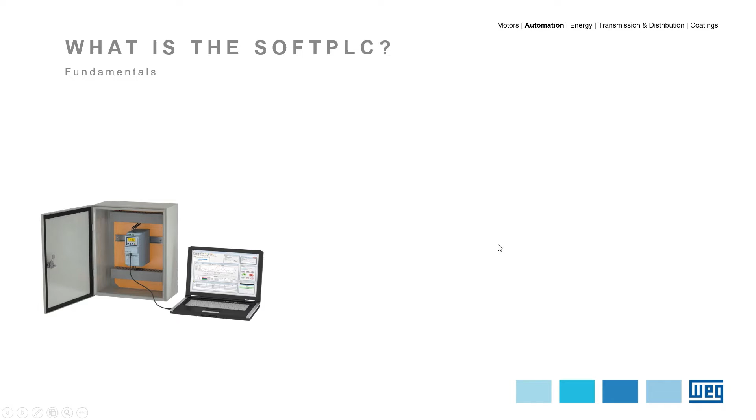So what is the soft PLC? The soft PLC is a feature, or let's say a tool, that brings PLC functionalities to a given equipment. In our case, it can be an inverter, a soft starter, or any equipment from WEG that carries the soft PLC function. And that eliminates the need for an external PLC when used for simple applications.

Basically, it's a tool where you can get your PLC code onto it—you get your PLC code on the drive itself. And with that, you don't need an external PLC attached to the drive.

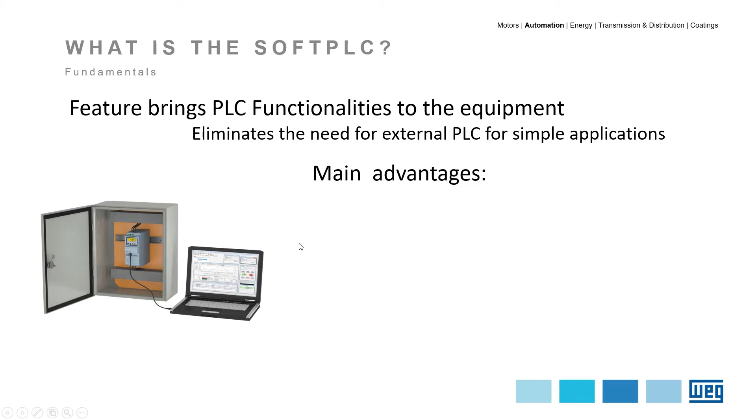Now that we know what it is, you must be thinking, why do I need this? In other words, what is the advantage of that? So I put down the main advantages just to show you guys as well. Number one is that you reduce your hardware cost with an external PLC.

So if it does eliminate the need for an external PLC, you don't have to pay the cost for that external PLC as well, right?

Number two, it reduces the required spaces on cabinets. So in this example here, you have the cabinet with one drive on it. If you need another external PLC, you will need to fit this external PLC to the cabinet itself, which in general means larger cabinets, right?

And if you think about ventilation as well, it means you need more ventilation to those cabinets when you have an external PLC, simply because the PLC will generate a little bit of heat, and you have to dissipate that heat as well. So in the world we are today, where efficiency is an important point, that means more efficient cabinets as well.

Okay, and this also eliminates the cabling between the PLC and drive. So if you have an external PLC, you need to wire that external PLC to the drive itself. You don't need that when you can integrate all the functions in only one unit, right?

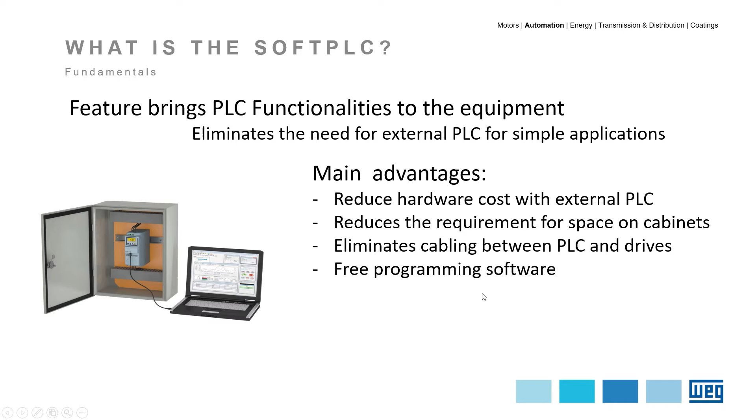Okay, so now we know what a soft PLC is. We know also the main advantages. So let's get to the basic operation. How does the soft PLC work?

So in very simple words, you're programming, or you can program your code onto this soft PLC function, and this code will be in ladder. For the ones that are programmers, ladder is a very known language in the market, and that's how you can code your codes onto the soft PLC, right?

So what you do, you will record this code internally to the product. That could be a VSD or a soft starter, and then you will also emulate this code via the product. So when you code it, you have to give it a go to start, and then the inverter or the product itself will run that software or that code that you built.

And then internally to the drives, we have a few variables which can be used in this code. And you can also use all the IOs, which is short for inputs and outputs, to do your code. So you can use that onto your program. And also you can read and write some of the things from your network and use that as well onto the code. So it's a very complex tool. You have multiple options to use it and to code it, and you can use it as per your convenience.

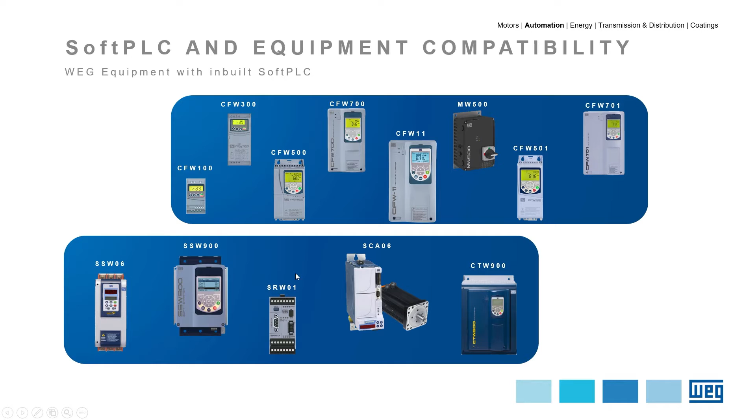All right, so moving on, guys, let's get to the interface now.

Okay, now let's talk about the software interface. We have basically two different softwares to do the interface between your computer and the product itself, which you're gonna get your code onto. The first one is called WLP, short for WEG Ladder Programmer. And we have another one as well, called WPS, which is WEG Programming Suite.

Today I will focus a little bit more on WPS, which is the latest software, if I put it that way. But I will touch base quickly on the WLP as well, so you guys get a taste on how it is, right?

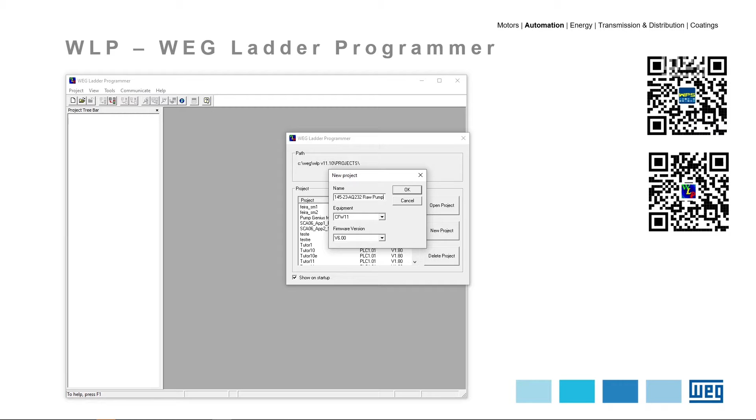I'm gonna create one, give it a name. You can give the name of your drive tag number or something like that. Let's pretend this is a tag number, so G23 switch room and the equipment AQ232. I prefer in capital. And then I'll get raw pump. Cool. And let's say this is the CFW11 and the version itself. Okay, so this is how it looks like.

I'm gonna put it in full screen just so you get a better view of the software itself, right? So this is how it looks like. You will have a blank page where you can create your code, and then you can start creating your code with the functions you have available in here.

So what I can do is something like that just to get a little bit better organized. I like to organize stuff this way, but anyway, on the top here you have a few menus as well where you can save backups to be used in the future. Guys, I'm going really quick on this one just because the focus today is on the WPS, but I guess it's quite intuitive as well. I would encourage you guys to give it a go and try using that, right?

So to create, you can just get this one here, for example, normally open contact, and I'm gonna get a coil in there. I'm gonna get a normally closed as well, just in case. And for example, I can connect the dots using this, right? And then if I double click on the normally open or any block, it will give you the properties of that given block, and then you can choose what you want.

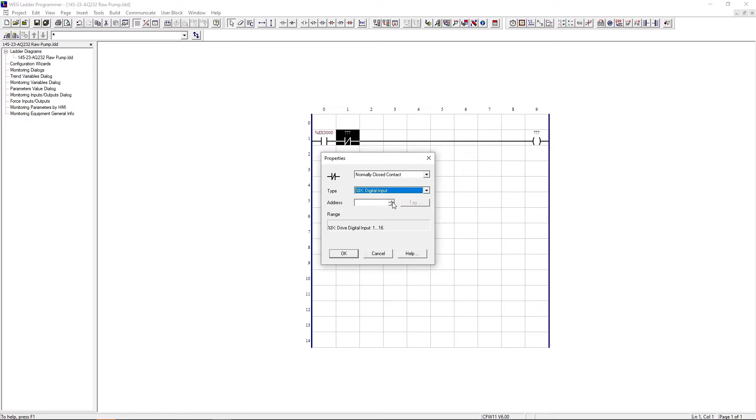Okay, I'm gonna leave it as normally open, and I will use this normally open as a system marker as a general enable. And then I use this one as normally closed, and I address that to a digital input number 2, for example. And the coil I can address to markers, or I can address as well to system markers or user parameters and stuff like that. And I'm gonna say, well, for this one, it's a run stop command.

So in short, what this line is saying is that when you have a general enable enabled, so this will be closed, and you have the digital input off, right? So when it's off, this will be closed as well, you give it a run command to the drive. If the digital input is on, this will be opened, so you don't have then the run command. Either way, if your general enable is off, this will be off as well. So guys, this is in short how it works.

I don't wanna go too deep on the WLP, it's quite intuitive. I think it's time now to close this one. Do you wanna save? No. And let's get to the WPS now.

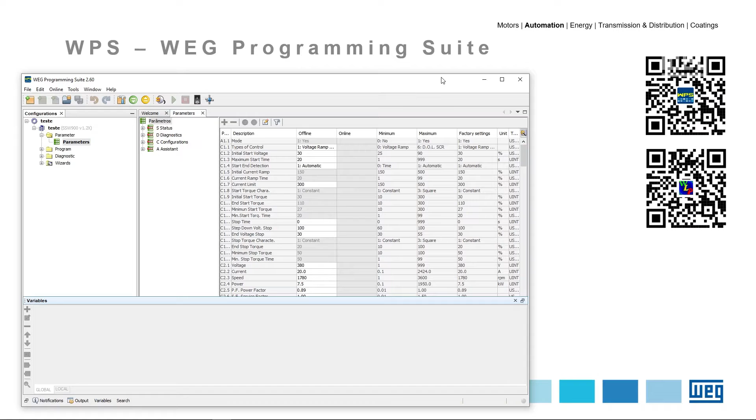Okay, similar to the WLP, I'm going to open the WPS software as well, so let's give it a go. We're using version 2.6, and it's opening now. It does take a while to load a few of the modules. Since I was using it before, it opened in a different way, so I'm going to close this one and take this test off. Let me delete that to start from scratch.

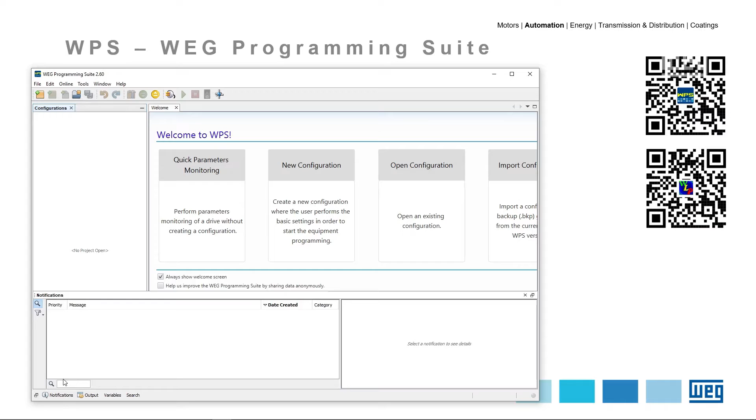All right, so this is from scratch. When you open the software, it will open this way. Eventually you might have notifications to get your system upgraded. When we have news or new modules, and you're connected to the web, the WPS will communicate and tell you that you need to do upgrades. In this case, I don't have any.

So what I'll do is shut this off and start a configuration file. Guys, I have in my computer an SSW900, which is a soft starter connected to my computer, so I'm going to use that. When you create this configuration file, which is basically a folder, you'll see when you open it, it gives you a few options.

So again, I'm going to set the configuration name. I like to put tags on it: 1-2-3-4 dash switch room 56 dash 78A, which in this case will be a compressor - compressor 1. And I'll use the resource name as SSW900. Let's give it a go, hit next.

So I know what the device is, so I'm going to select the SSW900 here. I like to test it before, and it's saying the device is online, so good to go. I'll hit next. Now the system is creating all those folders - it can take a while.

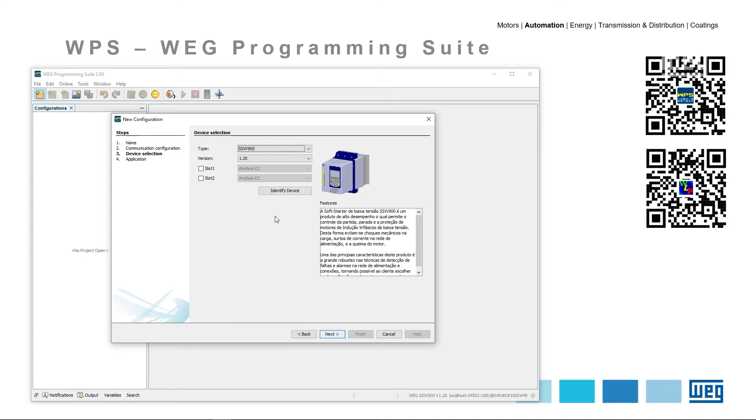And here we go, we have the SSW900 connected. It's giving me the version of the software - the one I have is fairly old, so it's 1.2. I'm going to hit next.

So when you hit next, you get to this page where you can actually import a WLP backup, which remember is the software we were talking about before. If you have a backup from WLP, this is the time where you can load that file into this configuration file. I don't have any, so I'll leave it blank and hit finish.

Okay, so you can see now we have compressor one in here - it's a folder. So we can see it better, I'm going to make it full screen as well, and I'm going to open this one. So that's equipment WEG, and then I have different folders in it.

This is very interesting - I can open, for example, the parameters folder, and if I double click on parameters, it will open all the parameter files in there. I have an icon to connect to the device, so I can use a shortcut, which is F9, and I'm going to connect to the device.

So what I have here is your online data. If I change it to 240, for example, it will change up there. So if I change the current to 5 amps, for example, this is changing online, this information onto the soft starter. So instead of using your HMI, this is another option to get the parameters configured onto the device itself.

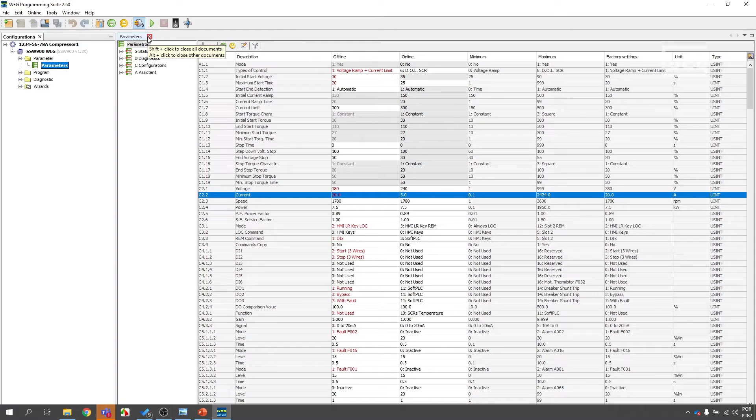Okay guys, now that we've finished with the parameters, let's move on and I'll show you the wizards - I think it's a very interesting tool as well. Let me open this up so you can get a little feeling on how it works. So this is how the wizard looks like - you can actually see the graphs and how to get your parameter settings onto this data.

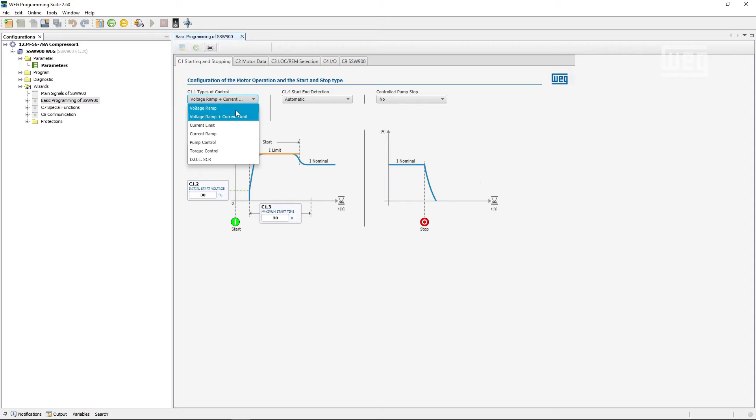So because we are talking about soft starters, this will bring the information for soft starters. But if you have an inverter, for example, then you'll have different options in there to reflect the inverter operation. So in this case, I can change it for a voltage ramp, for example.

Here I can change the initial start voltage level from 30 to 40, for example. I can also set up the starting time, it was 20 seconds, I can get 50 seconds, for example. Then I can check and change a few of these options on starting and stopping.

If I move to the motor data tab, that brings up a visual picture of the motor nameplate. In this case, we have a W22 example, and you can gather information for each of these fields. So it's very intuitive and easy to find.

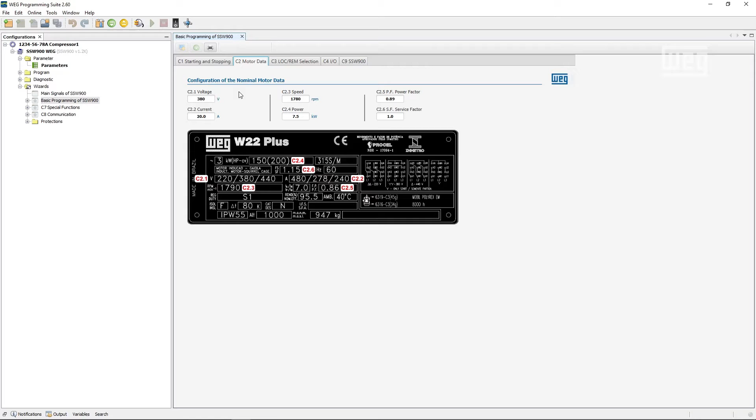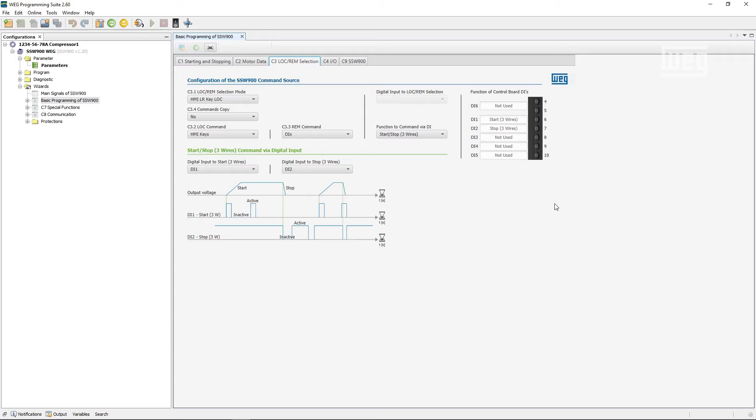Then we get to another tab, the local remote selection. This is basically how you set up your starter automation, let's say when it's in local, what you will do, how you're going to give the commands to start and stop. This is done via this tab.

You can also set up your IOs here. There's a graphic that, for me, is very intuitive as well, because you can see exactly how to connect your IOs, and you can give the functions of those IOs through here too.

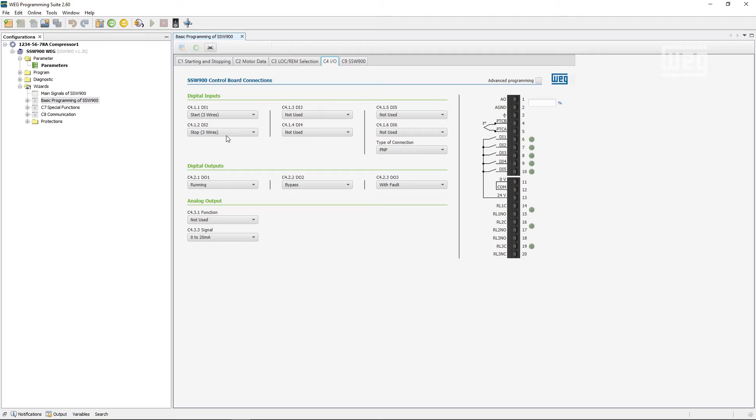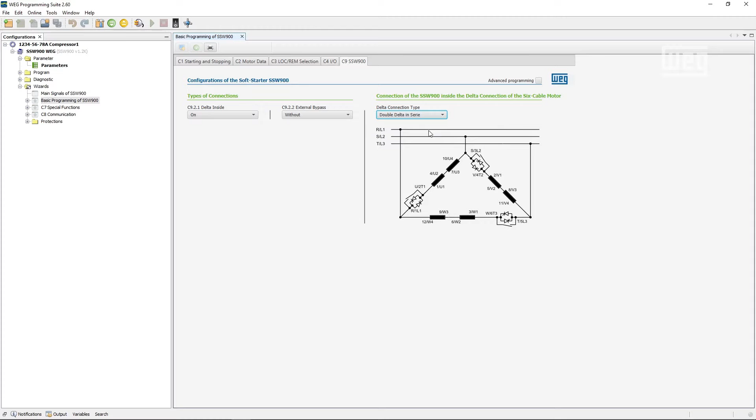Then the last one is basically whether your connection is inside Delta or not. If it's inside Delta, it will change the graph, so you basically know how the terminals should be connected with the motor. And if you have different types of motor, it will also give you this graphic representation of your connection points.

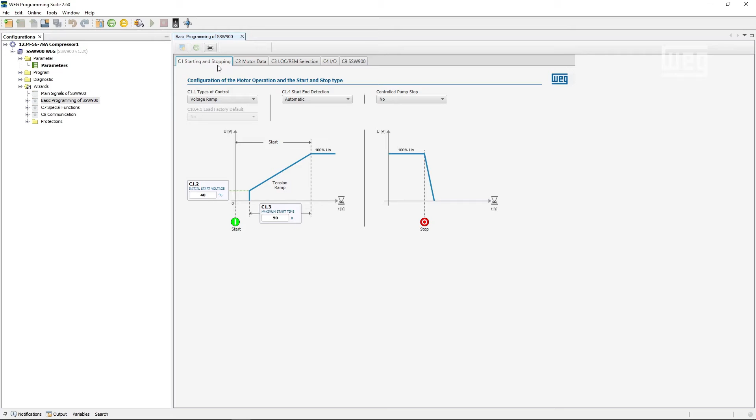So for me, this is a very intuitive tool. It's bulletproof, so it's good to set up through that as well, just in case you're having difficulties visualizing how to set up via the HMI. A good tool on the WPS.

I won't save it because we're not actually doing that. There's another diagnostic folder where you can actually create trends. You can give it a new file, say this is trend number 1, finish. Then when you open this trend, you can add channels to it, and those channels can be different things.

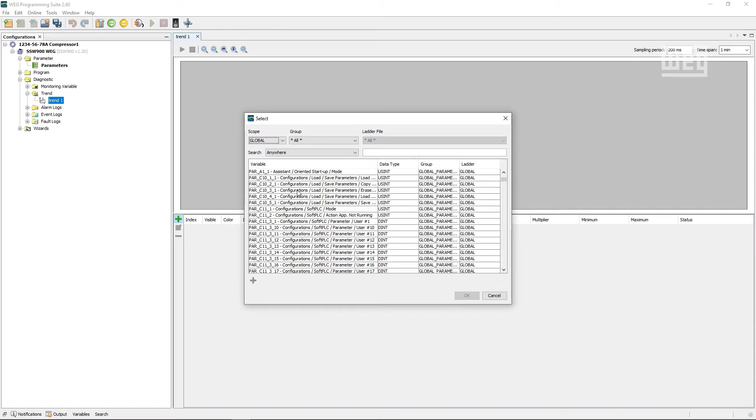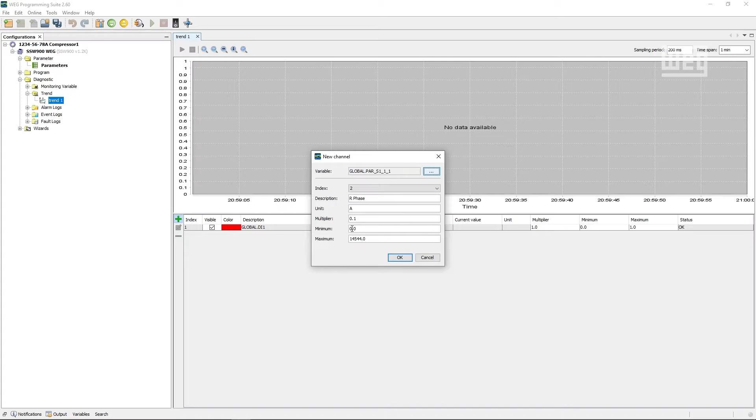And then if I am connected, yes, monitor straight away, I can trend that. Because my soft start is not running at the moment, it's all at 0. But if I change the status, then you will have the information in there.

You can change the sampling time over the top, or the time span as well, instead of 1 minute you can get like 15 minutes. Then you can stop and close if you want, and it will ask if you want to save. Yes, okay, that's saved. And if I open again, you get the saved trend onto your file as well, in this big folder with information from the soft start.

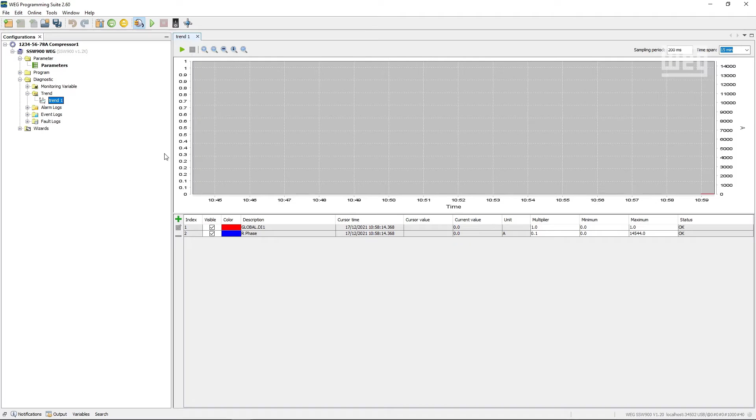Again, this is a very good tool when you're commissioning your soft starter or equipment, because you can save the trends. For example, you can rename this, like this is the 1, or you can put 01 first start, for example, and then you have that information on how the first start was. You can rename it, and that's a few of the tricks I've learned along the way.

So you can put 01 and you can put a year or a date, so you can say this was on December 21, for example, first start. Then along the lifespan of this product, if you connect again in the future, you can save another trend and compare how it is doing. So it's a very good tool to use.

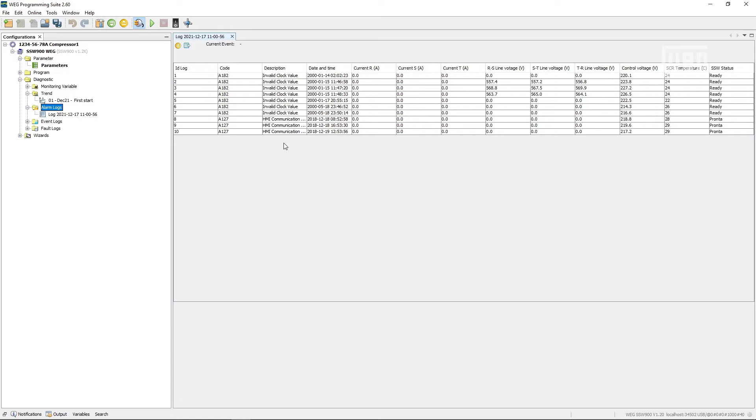Then there are a few other things, the logs. It's pretty intuitive as well. You can load these alarm logs from the product, then rename it. It will bring some information in there, but you can also rename it and delete it if needed, say if it's too much information. The same works with faults and the event logs as well.

So diagnostics is a good folder to keep track of how the equipment is doing, and it's very good as well for commissioning, when you can trend the data and get the best setup possible for your application.

Now let's move on to the intent of this presentation, which is the ladder. I'm going to open the main ladder screen. I'm not going to connect it, because when it's connected I can't actually make any changes, so I'll disconnect it and have the space to do my code.

So this is how it looks like. When you first open it, you have only a single line. Important point: when you need to add lines, you keep adding lines like this, and you can also delete lines. So I'm going to add this line.

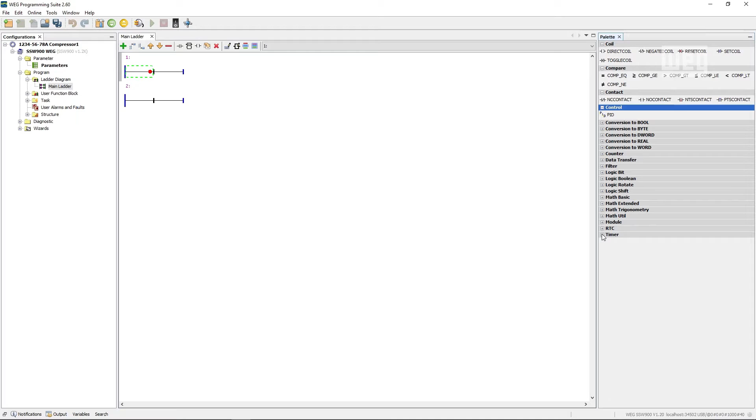So those are the options you have to code or use in your code. You have coils, comparison blocks, contacts, controls, PID controls, data transfer, mathematic functions, timers, and RTC modules. So there are a few options in there.

The way it works, we just get one. I like to get contacts because we use them fairly a lot, and you can just leave it there. And I can use another one, leave it there. And then I can finish it up with a coil, for example.

So this one didn't go, I'm going to place it in there. You can see the red dot, which is the end of the line, and then you just need the coil after that. So we have all the blocks and the coil itself.

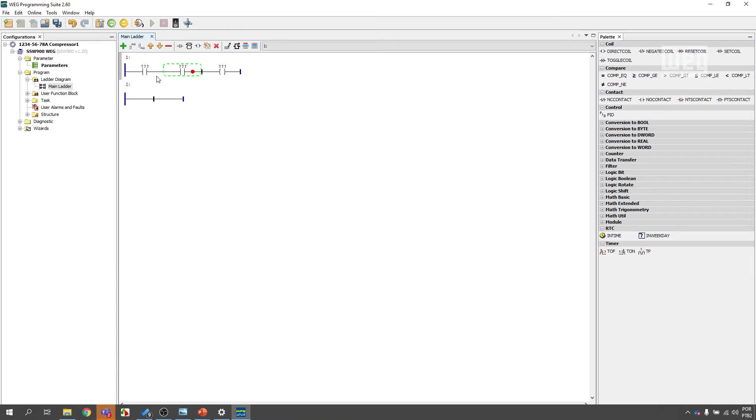And how do I address it? I have to double click on it, and that will bring a few options. Note that for the soft starter I'm using today, just out of convenience, I don't have as many options as usually I have in the inverters, but I have a few. So let's say I want to set up something similar to what I did before.

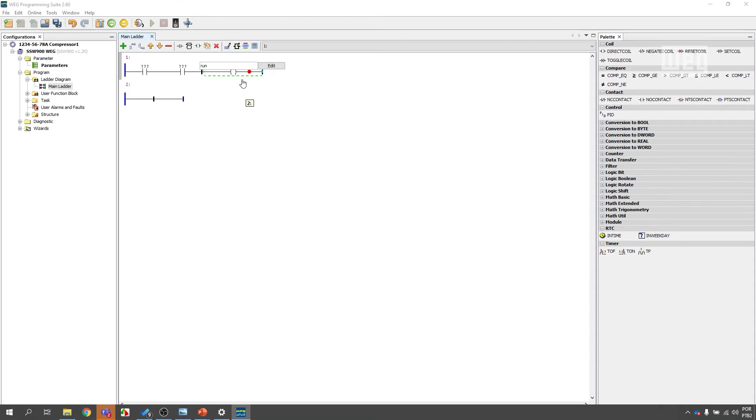I can set this up as a run command, so it was actually run. I'm going to take this off and get the option. I'll type it in, I'll get run stop. I can identify this as a digital input, for example, and identify this one as a digital output. So in this case, when digital input 1 is closed, digital output is closed as well, and I'll have the run command to the soft starter.

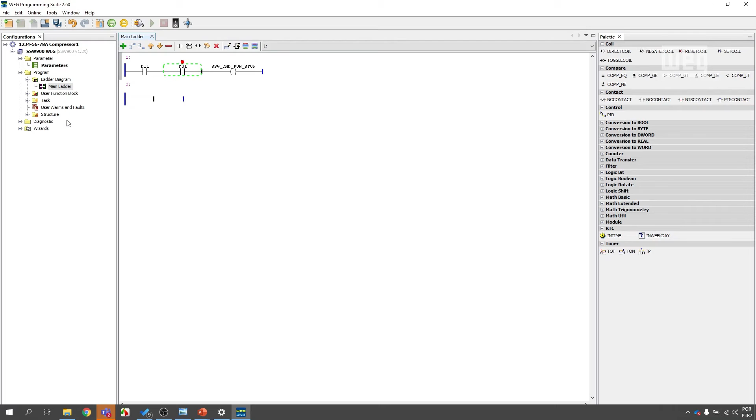So this is how it works, guys, pretty simple, pretty intuitive. What I'll do is continue my presentation, because we'll get back to this point since we're going to do a programming example, and we'll do one example together here so you guys get to understand a little bit better. But in general lines, this is how the WPS looks like, very intuitive, very simple to use.

So one is the metallic box detector, we will have as well the counter for the metallic boxes and also the counter for the plastic boxes. And then we will need also to operate this pneumatic actuator just to do the boxes movement during this process.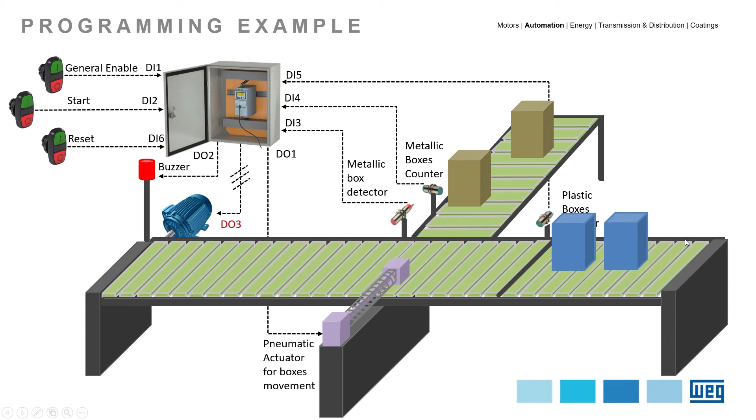The way it works: this tray will be running. The metallic box detector detected that this is a metallic box, so it will push that way, coming back. If it's not metallic, it passes through straight. So again, let's show you: this will be running, metallic goes to the top, non-metallic goes straight, and then this would stop when you have the next amount of boxes either way.

All right, so let's again open the WPS to do that. Let's go back to the WPS. This is the WPS, so let's do it.

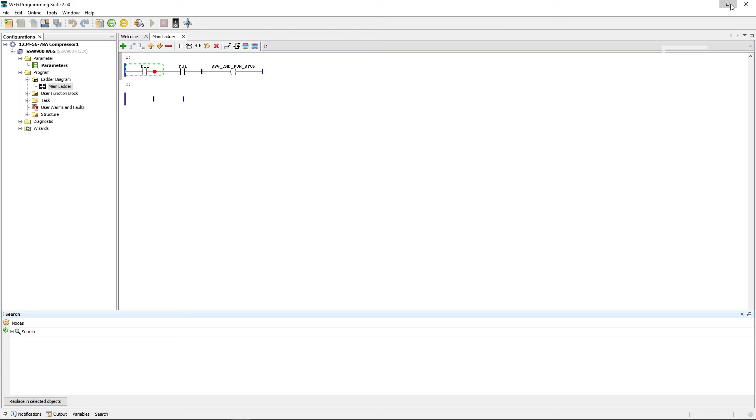So what I'm gonna do, I'm gonna reduce this one here just so you guys can actually see what I'm doing. I'll close this one up. I will then get to show you the IOs. In this little window here, you will see how I can force the IOs.

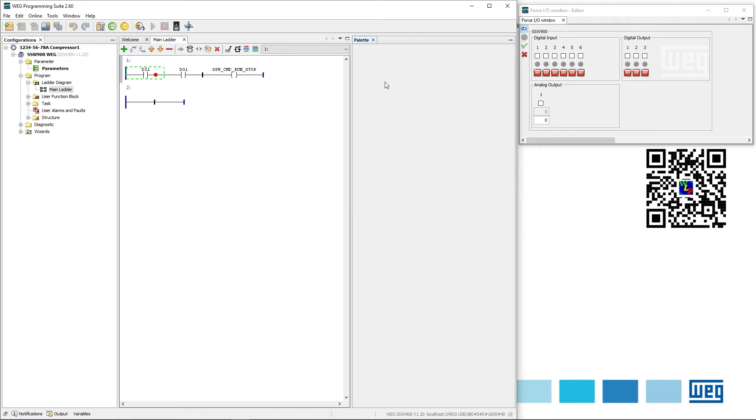I just want to get as well the palette so we can get the data on it. Let me give it a connect. I'll disconnect. And now, what we'll get as well is a photo or picture of the application and also the IOs, so we get to know which one is which.

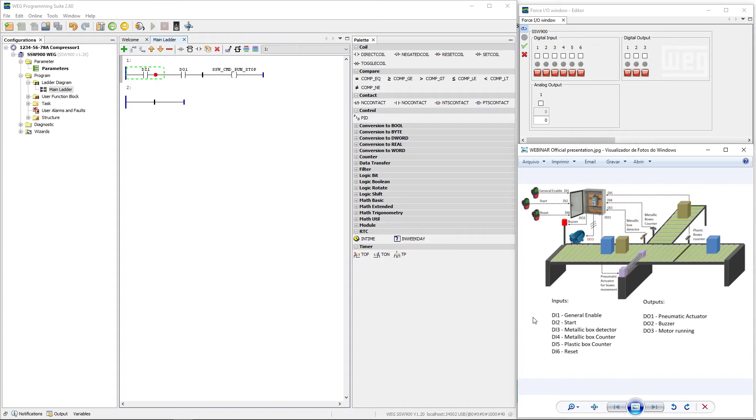So, okay, let's get it started. What we'll do first, let me remove this old software and we can start with the new one.

With the new one, we have digital input 1 as a general enable. So what I'll do is get a general enable actuated via digital input 1. I'm gonna get this and this. This one here I'll address as general enable, which is CMD general enable. And this one here I'll address as digital input 1.

Cool. So what I can also do is write in here: this is the general enable line. Okay, so we have the general enable.

Now, what do we need? We need to get the start command operating, which is via digital input 2. I'm gonna get digital input 2 in there. In this case, I will interlock it as well with the general enable, so I'll get a second set of contacts in there.

So this will be my digital input 2. Choose that. This will be my general enable, let me find it in here. My general enable, right, and that will actually get to my run command.

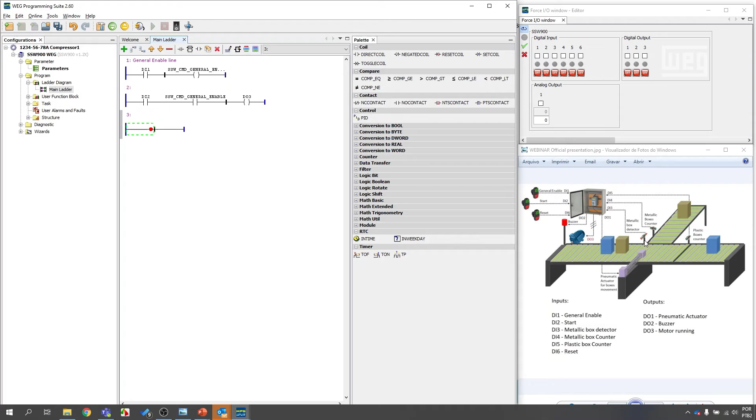What we need to do is actuate the pneumatic when there's a metallic box on it, right? Before we go further, I'll get the start - this was the start command. So this one will be the metallic box identification and the actuator. To actuate that, I need digital input 3 to be closed.

And the unit needs to be running as well, right? So I'll get one here. Because it needs to be running, digital output 3 - it has to be running, I'll choose that. The other thing that has to happen is it has to get the detector, so digital input 3 needs to be closed. When you have this and that running and a metallic box pass through, then you actuate digital output 1.

So before we simply actuate, what we do is I'll have a timer, right? We wait a little bit until we get through exactly the moment. So I'm gonna say this time should be like 1 second. I'm gonna get one - hold on, let me get the second first. This will be in seconds, and this will be 1. Enter. So it's gonna take 1 second, wait 1 second, and then I'm gonna close the actuator.

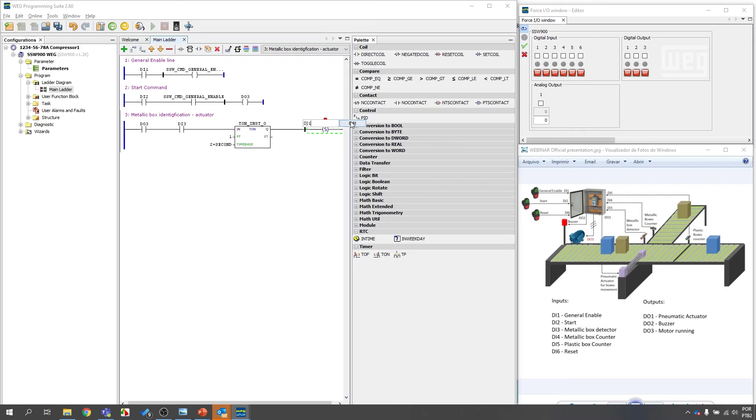Which is digital output 1. So let me get a direct coil - I'll probably get a set coil, because once this is closed, I need to, you see that, right? So this is digital, then output, digital output 1. Okay, let me move this a little bit further this way so we can see that.

Okay, this action, yes, okay, right? And now it is writing into the device. I'm gonna connect there. Say okay, yes, okay, run the software. So let's see, when we close digital input 1 - I'll just, because it's forced off, I'm gonna force it on. So you see, when I close digital input 1, I got the general enable. If I open digital input 1, I don't have the general enable anymore.

So when I have general enable on, and then the run command, I have digital output 3 on, which is our run command. So the motor is running now. And then when I have one metallic box passing through, it took 1 second, and then it closed number 1. So it is actuated.

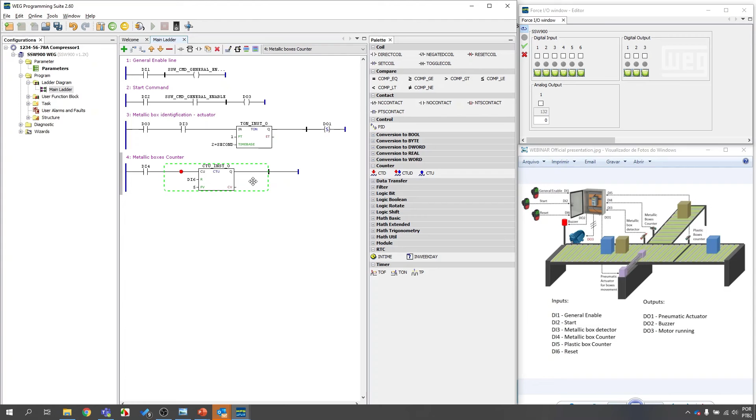And after 5 times, what you will do, you will check the DO3 - hold on. After that, we will have to stop the whole thing, okay? So the whole thing is running because of the DO3. So what I'll do - I got a glitch in my software. Instead of a simple coil in here, I need to get a set coil, because I'm gonna set this coil here.

Let me take this off. I'll get a set coil instead.

So this is DO3 to run. So once it's running, you just need one pulse and it will start running, and then you need a reset button to stop running. So I'm going to reset coil here now for the digital output 3, right? So this will stop the whole thing. Also, I think that's all.

DO1, which is the pneumatic. Okay, so we need a DO1 as well to reset. But let's see how it works. Let's see how it is doing. Let's build it.

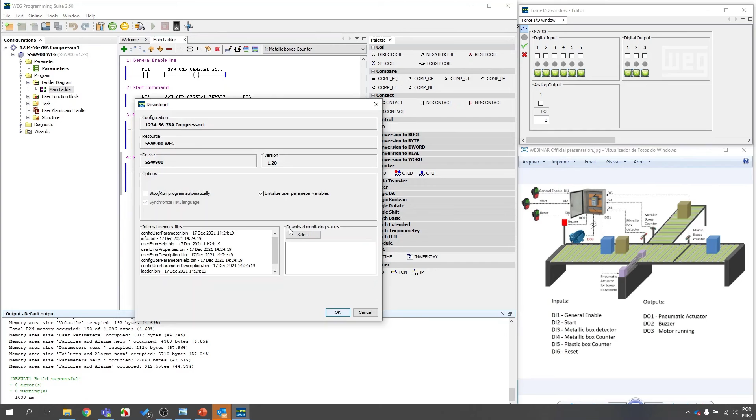Okay. Let's connect. Yes. Run. Okay. Yes. Okay, it's running. So general enable, then run command. It is running, okay? So it's running, I'm getting the boxes. So let's say this is a metallic box, okay? It's a metallic box, digital input 3. Okay, the actuator now has actuated, right?

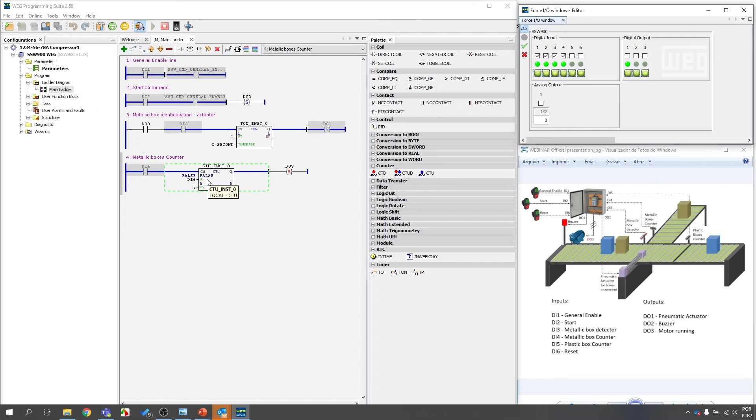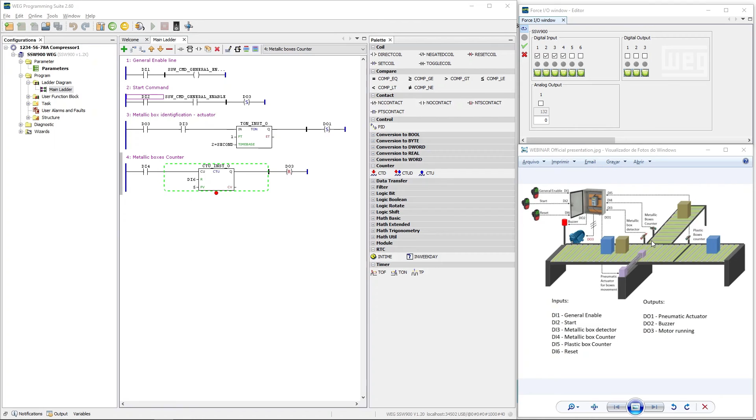The only thing which is still not working is to return this actuator. Okay, so now we have to fix the actuator which is not coming back, right? So for the actuator to come back, we need to get the boxes through the digital input 4. So let's add another line and let's name this as actuator returning, right? So it will return after my digital input 4 is closed, right? So what I'll do, I'll name this as a digital input 4. And then I'll get a reset coil because I used digital output 1 as a set coil. Now to release it, I'll use a reset coil. So this will be digital output 1, which is the actuator, right? Cool. So the actuator is now returning.

So we have the counter, we have the actuator going and coming back, we have the start command, general enable. The only thing that's missing is the counter for the boxes, right? The cartoon boxes. So the cartoon boxes counter will be quite the same as the metallic, right? So what we will do, I'll get this line and I'll try that. I never done that. I'll copy that and then I'll add another one and I'll paste it. Doesn't. Okay. Let me see if I can.

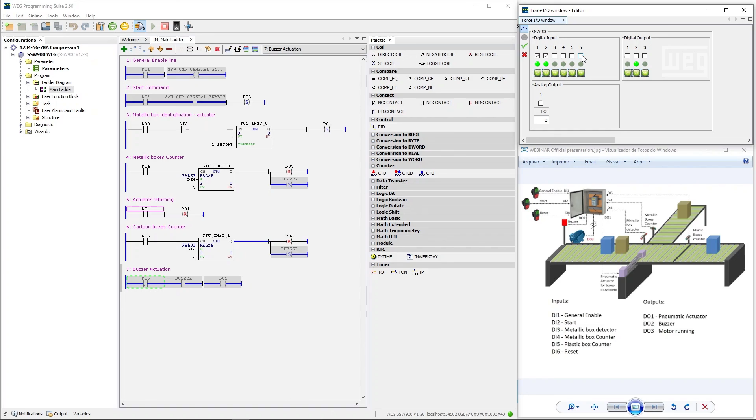So if I take the run command off and reset, okay, it's reset. So the thing is not running, right? And the buzzer is off as well. Okay, so in general lines, this is how it works out. So you can see the motor is not spinning, digital output three is open. So this is how it works.

This is a very simple code, but I hope you guys had an opportunity to experiment with that and see how we usually build this code. I know there's a few glitches on my code for this application itself. Usually it's not that simple, but this is generally how it looks like, okay? So the intent today is not to get you guys professional programmers, but just to let you guys know the possibilities and capabilities of this code itself, okay?